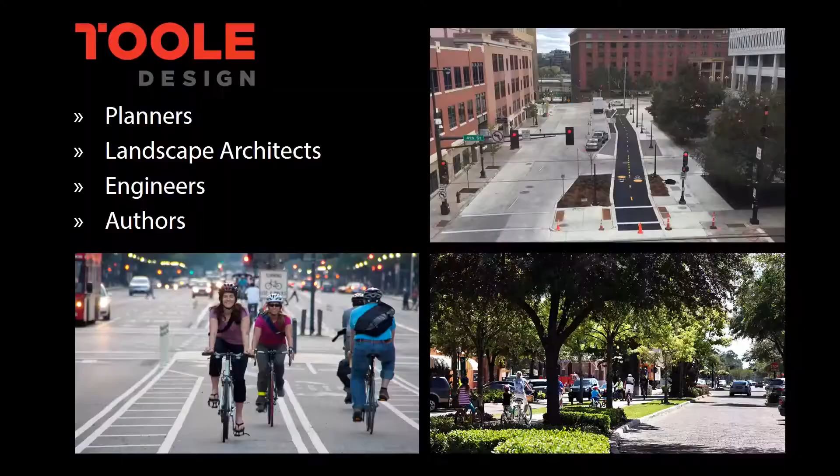We write a lot of these guides, and we share them with provinces, states, cities, and our competitors actually, to help them design really cool streets.

So this is what we did this week. We have four opportunities for public participation. We had two open studios where people came down, looked at plans, gave suggestions, looked over our shoulders, asked all sorts of things, had suggestions. And we had a public meeting on Tuesday evening, and then we have this public meeting.

So what we'll do tonight is go through more or less what we've heard and what we did, and then we'll ask you for your input, since you haven't had a chance yet, so you can share with us.

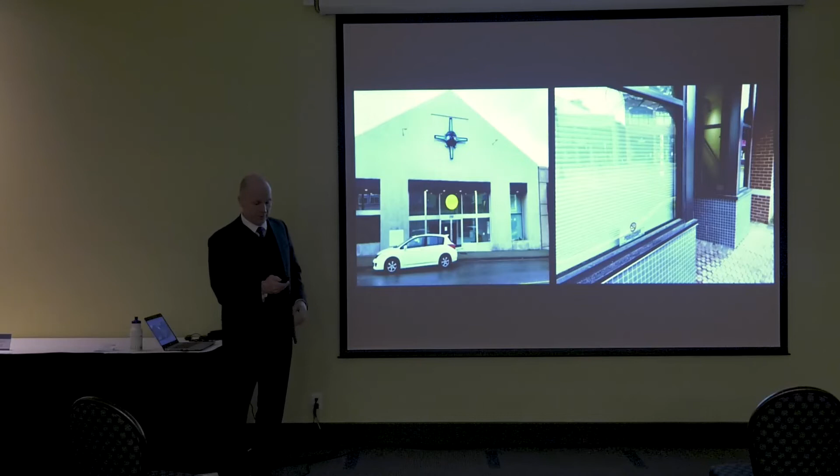And then from an access perspective, we want it to be friendlier for people with disabilities. We want the sidewalks wide enough so that maybe two couples could pass, that kind of thing, that you can have your displays so you can get your loading done. Parking is important to a lot of people to access the downtown, parking for cars and for bicycles. Keeping the street network intact so you can access the neighborhood from various locations.

And then removing obstacles. There's some trees that are in the path. There's sandwich boards that take up a lot of the sidewalk width. There's a bunch of obstacles, and if we could get the sidewalk widths wider, we can have room for those things and people to walk more comfortably.

Legibility is really important. So when you're on the waterfront, do you know that there's a downtown up there that you could go to? You've got some really great landmarks like the Bastion, and when you look the other way up Bastion Street, as you kind of go up the hill a little bit, there's a great view of the church. And so these are landmarks, and they can help people navigate.

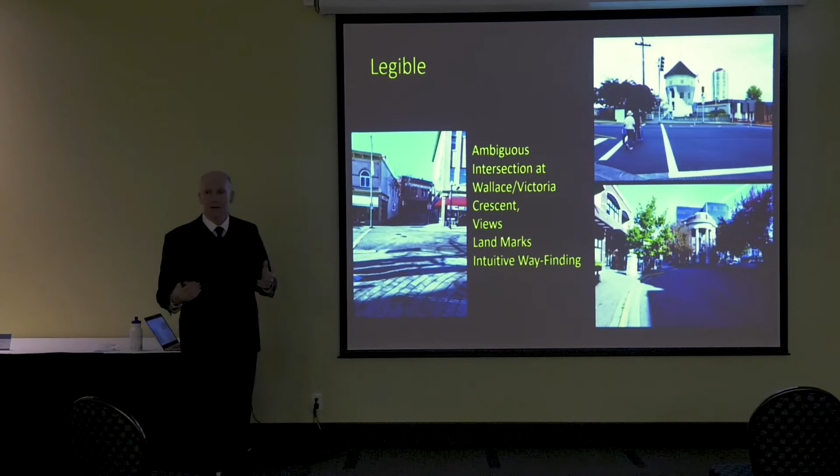There's some places that aren't legible, like that intersection we were talking about earlier. So we'd like to correct that, just so that everybody can intuitively find their way around the downtown, whether you're on foot, bike, car, what have you.

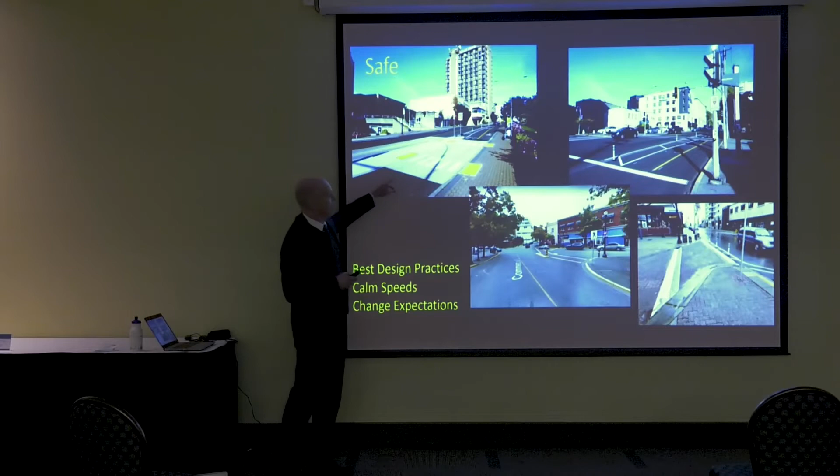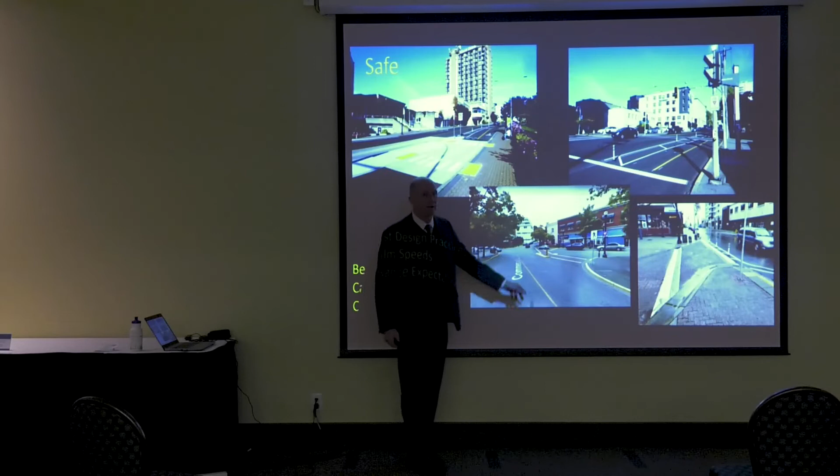We also want to make things safe, and there's already been a lot of work done on Front Street to try and make the street safer and more comfortable for cyclists and easier to cross through that project. But in towards Commercial, there are places that we would like to use best practices to reduce the probability of any collisions, injuries, or that kind of thing. Like when we were at this intersection, there was plenty of honking and discomfort up there.

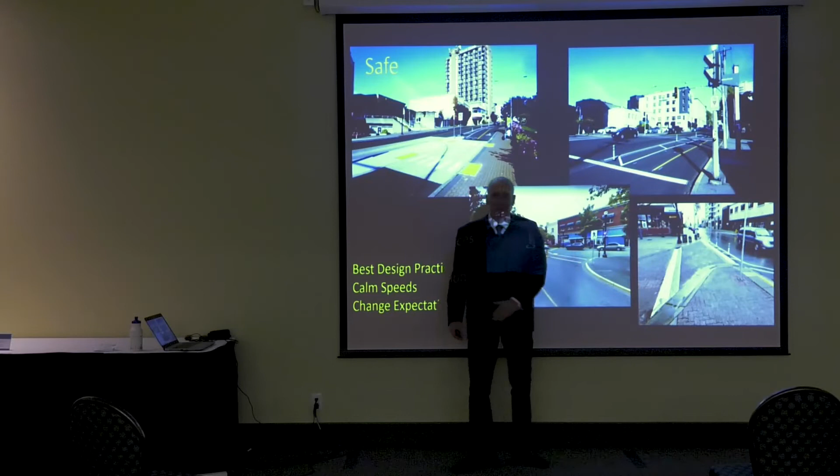This is the high-speed turn channel at the end of Church, which the city has rightly blocked off because folks would come off too quickly up into the downtown.

And then equitable. We really want the downtown environment to be accessible for everyone who lives in Nanaimo or visits Nanaimo, whether you're using a wheelchair, if you have a visual impairment, or if you're elderly or young—to make it accessible for everybody.

My parents retired to Nanaimo, and my father used a wheelchair, so when I came here to visit him, he didn't have the best time getting around because a lot of the areas weren't really designed to accommodate him adequately. So I'd like to accommodate people with physical disabilities more so than it is today.

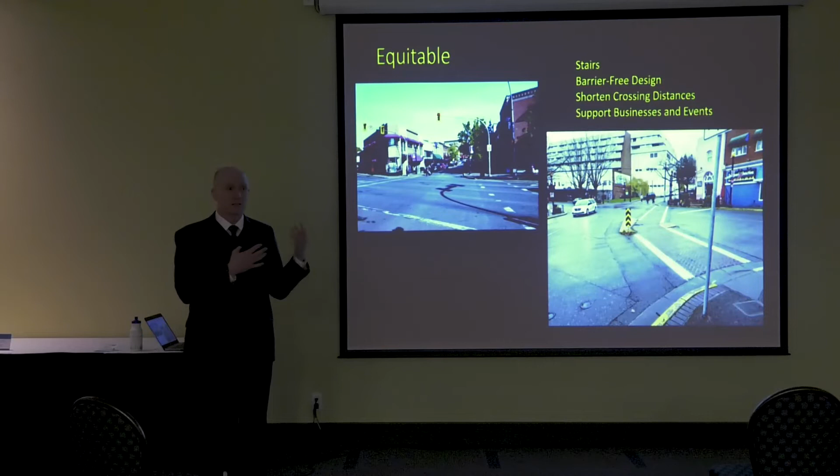We also want to support the businesses and the events. We really need to maximize the social and economic exchange. We need to design the street to help support the businesses. We want this street to attract more businesses to the downtown and more people downtown.

And we also want to integrate the public spaces with the street. You've got a couple of public spaces with tremendous potential: Diana Krall Plaza, the Dallas Plaza down at the end of Church Street with the cenotaph in it, and little public spaces like the Cole Monument just down by Church Street as well. But they're kind of alone—you have the street and then you have these spaces.

What would help you when you're doing your events is to better integrate the designs of the street and your public spaces, so that when you close your street you have a nicer venue for your events. So we'll be looking at that when we come back during our design week. Some of the students that visited us this week actually came up with some starter ideas, which will be shown in a few minutes.

A lot of cities develop what they call a vision, and a vision is a consensus of what the place ought to be like—not necessarily what it is, but what it ought to be like. So that's what we were talking about this week: what are our values, what should Commercial Street be like in the future?

There is no vision statement for it at the moment, but there's been a lot of work done through this Reimagine Nanaimo initiative, and there are all these goals that have been created. If you apply those goals to Commercial Street, a vision would be something like this: a green, connected, and equitable place that reflects the history of Nanaimo while attracting people, investment, and vitality. So that kind of reflects the goals.

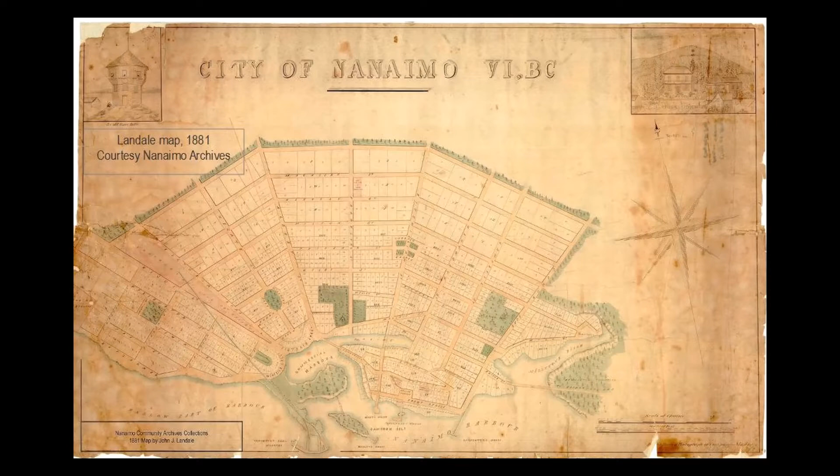The water came deep into the downtown. This is Commercial Street right here, and it goes into Church. So that's been there since the beginning, and that's why it has such a great history.

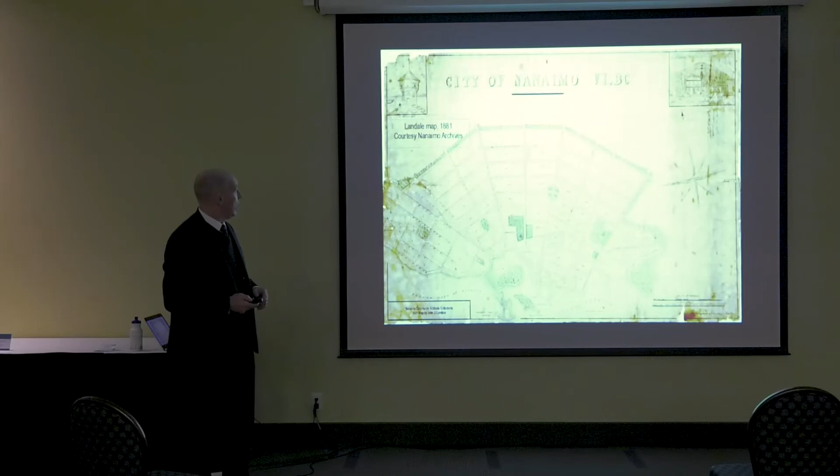And then over time, these areas were filled in, and the downtown expanded. These are some of the key routes through the downtown: Wallace, Terminal, and Front. And these created barriers, and there's some geographical barriers as well to access the downtown.

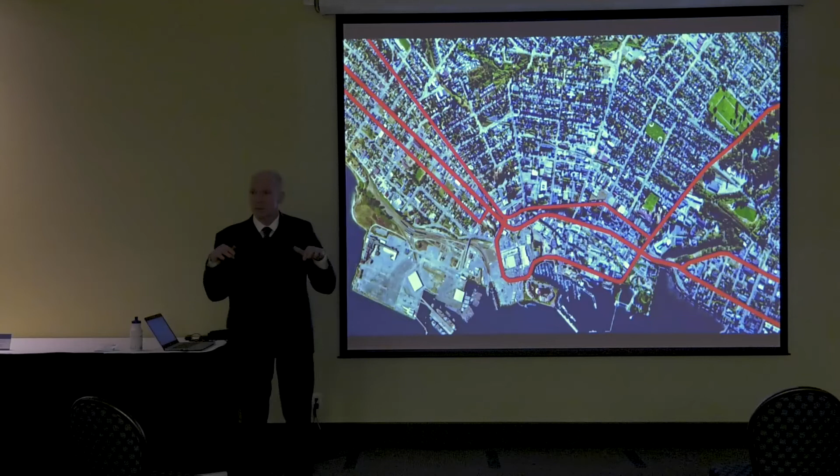So what we'd like to do is ameliorate some of those barriers to allow more exchange, more value coming to the downtown from the community, and make it easier to access the downtown.

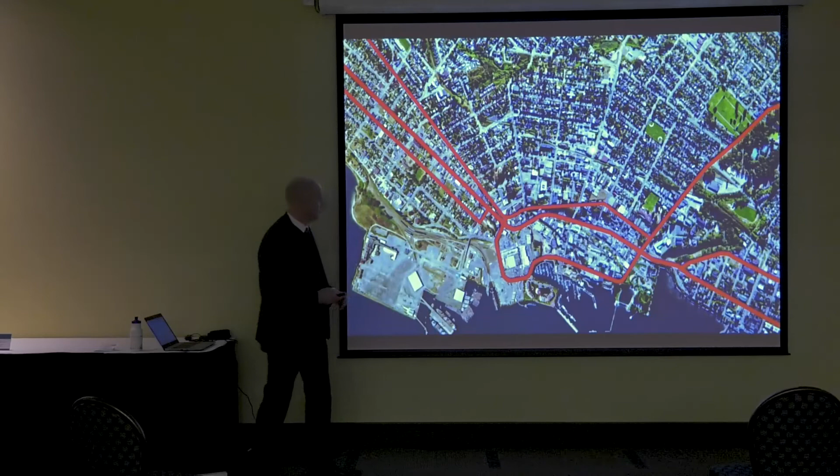And so that's what it looks like over the old historic map. You can see where there was water now—there's Terminal, there's Front Street where there used to be water, but good old Commercial Street still right there.

But the interesting thing, when you look back at the history of Nanaimo, for most of the history, there were no crosswalks, there were no traffic signals. These were all shared spaces where you could walk, travel, shop. They were truly public spaces.

And that's kind of the sentiment we'd like to bring back, is to make it a really public space. You can still drive on it, you can still walk on it, ride your bike, shop, socialize, but get back to the original historic intent, instead of some of the streets which are much more car-oriented for throughput.

I just want to go over the West Palm story. We've heard a lot about people experiencing homelessness, people with addiction issues and other social issues going on. A lot of places have challenges like that. And I'd like to share the West Palm story with you, because that place had pretty serious issues like that as well.

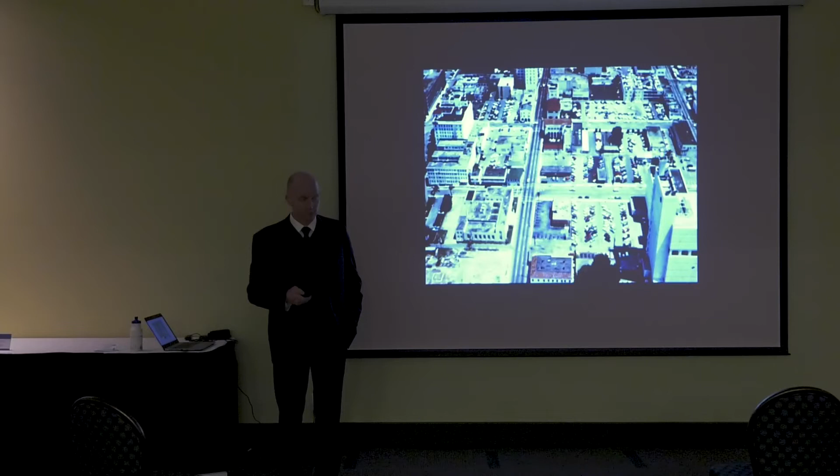When HBO needed a location to film a documentary about drug abuse in the United States, they came to West Palm Beach, and they found everything they needed in our downtown. It was nominated for an Academy Award in 1989, and that's how everybody knew about our city.

And so we had really serious problems. Half our buildings had been torn down for code violations, or they fell down, and they became surface parking lots where people drove back in for jobs. And so this is what we were left with, this sort of vacant city that was boarded up.

Derelict and quite unattractive. This place used to have houses on it. They were all torn down.

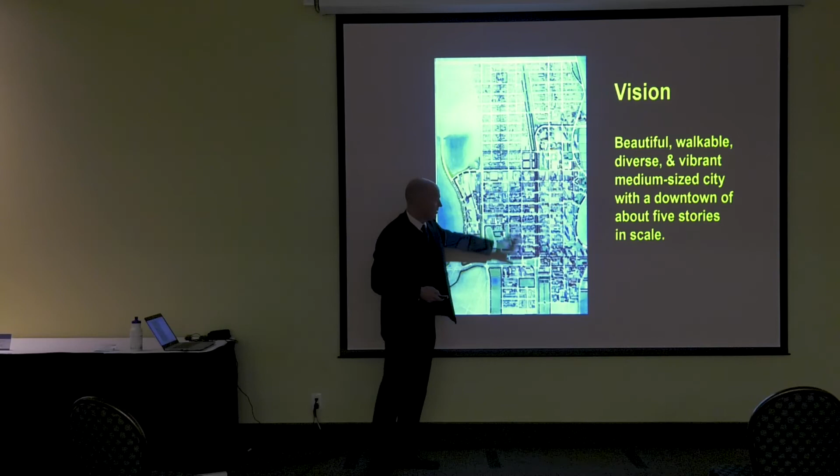And the mayor, Nancy Graham, decided to do something about it. She was newly elected, and she had a charrette, something like this, but involving a lot of people across the whole city. They came up with a vision, and they actually drew it. They drew this fantastic land use vision of this mixed-use development with housing and shops and grocery stores and all the sorts of things you'd want in your downtown.

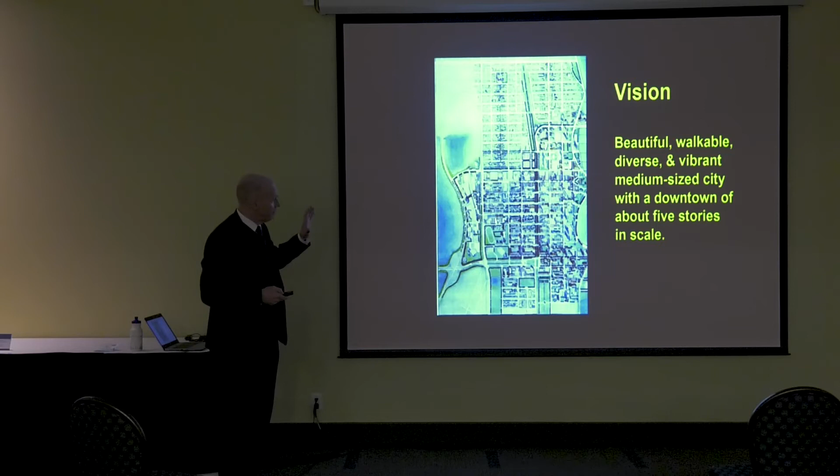But they didn't draw the streets. And so that was my job. I was to make the streets support that wonderful vision that they had for the downtown.

So I had to go to the state, which is like going to the ministry here at the province, and say, look, I'd like to change something here. I think we've dedicated too much space to motorists, and I'd like to remove one of those lanes, widen the sidewalks, plant some trees, that kind of thing, to make it a place that people would want to come to.

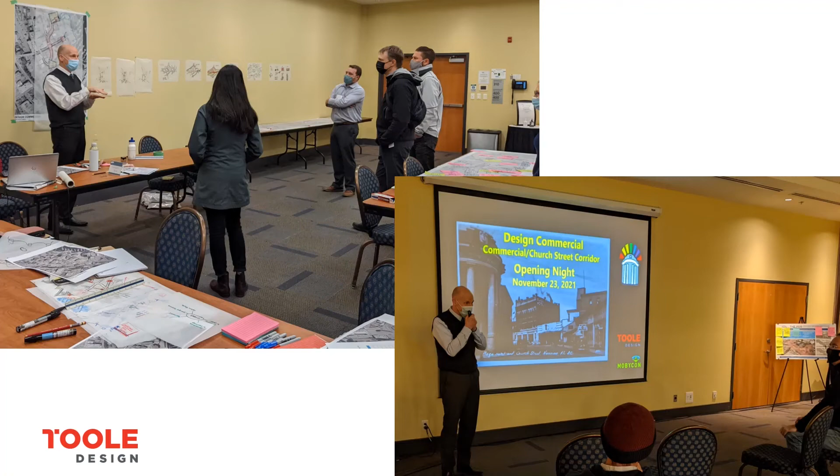And we went on walks and saw the area, learned about the physical layout of the place. People came in, and we had pinups. We had a little public meeting. Got input then, and here's some folks talking about some ideas for the corridor.

These are the students drawing some ideas for a couple of the plazas. There's one of the groups. So this is what they came up with.

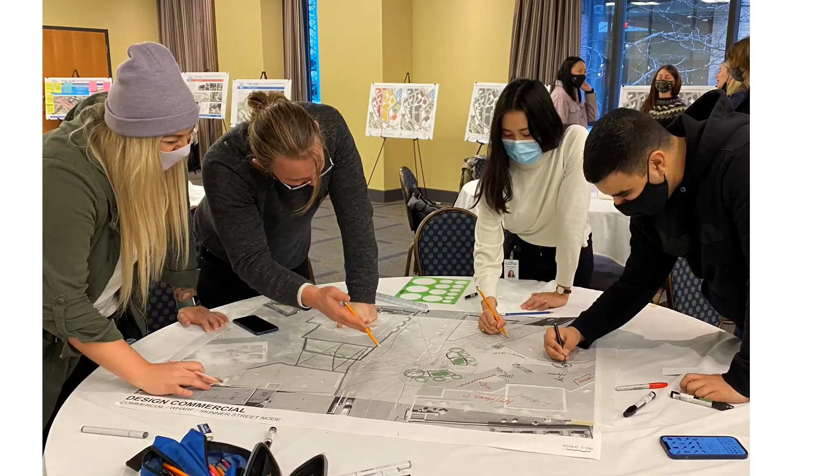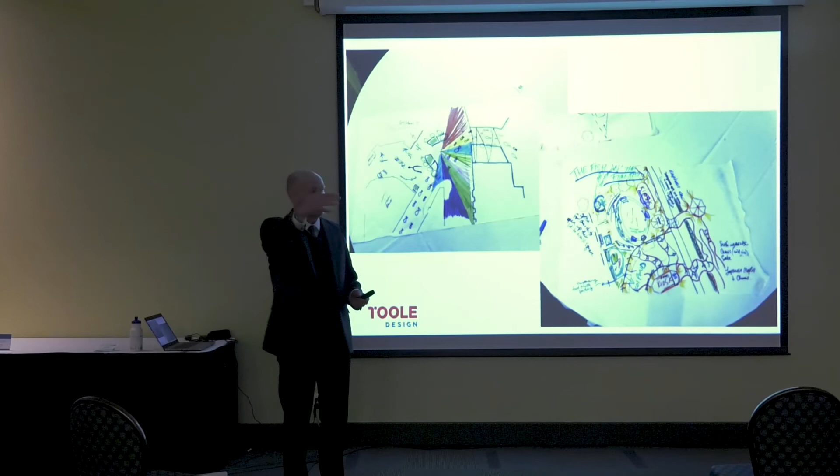Some really terrific ideas about how to expand Diana Krall Plaza and include the street, so it doesn't feel like such a separated place. Adding other musical elements into the music theme. Cool wayfinding idea of having salmons, artistic salmons starting down by the water, coming up the street and into Diana Krall Plaza, like a wayfinding thing. It would be really interesting.

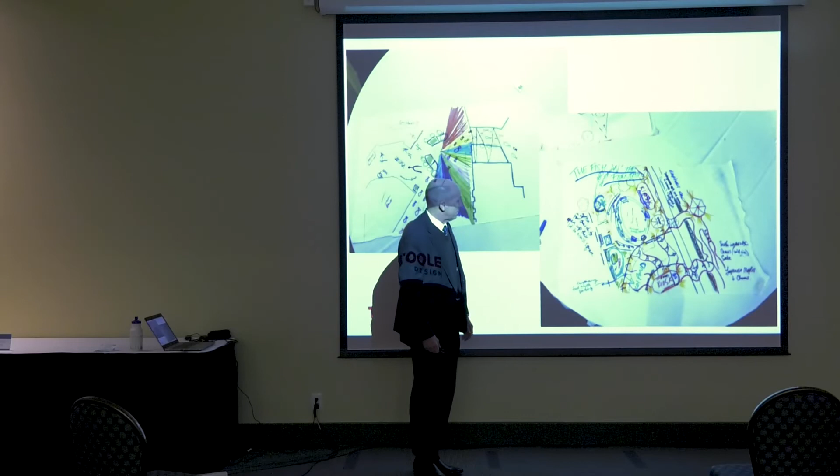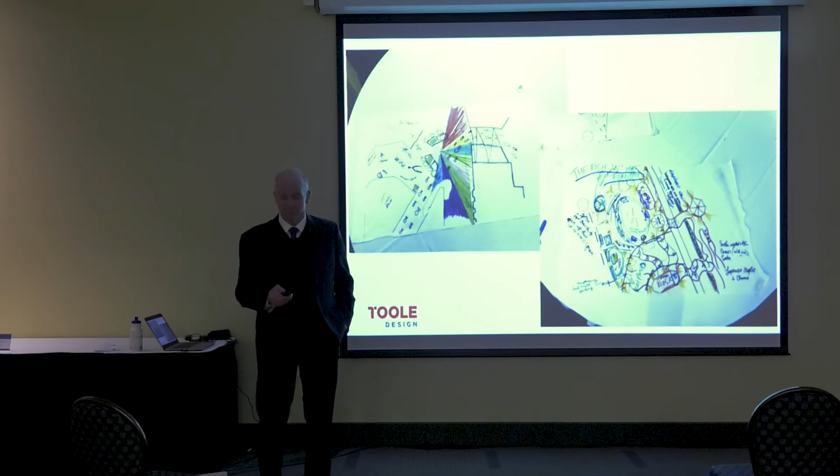And then we looked at the Dallas Plaza, where the cenotaph is, and found ways to make it more interesting and more active, so it can still do its ceremonial roles, but can have other uses for the rest of the year as well. So it's just not a November 11th thing.

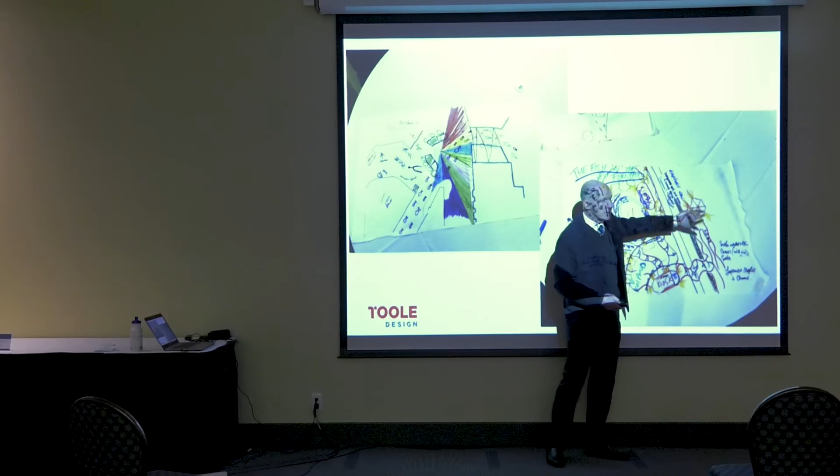One of the ideas, which is pretty neat, was to spread some of the plaza ideas across Front Street, so that when you're going through there, you know that this is an entryway up to some place that could be really interesting, to sort of advertise the fact that you've got this really cool street up there. And then we had our intern put it all together for us right at that table right there.

In terms of accessible, there's a lot of interest in making it more pedestrian friendly, making spaces more flexible, especially for events. Ensure loading zones. Not everybody has an alley where they could load, some people have to load off of the street. Accessible parking. The sidewalks was important for a lot of people to make them wider. Uneven surfaces - these are the sorts of things that people were interested in.

Folks wanted some wayfinding, get rid of the confusion at some of the intersections, safer crossings, reduce the high speeds. Somebody suggested a roundabout up at that strange intersection.

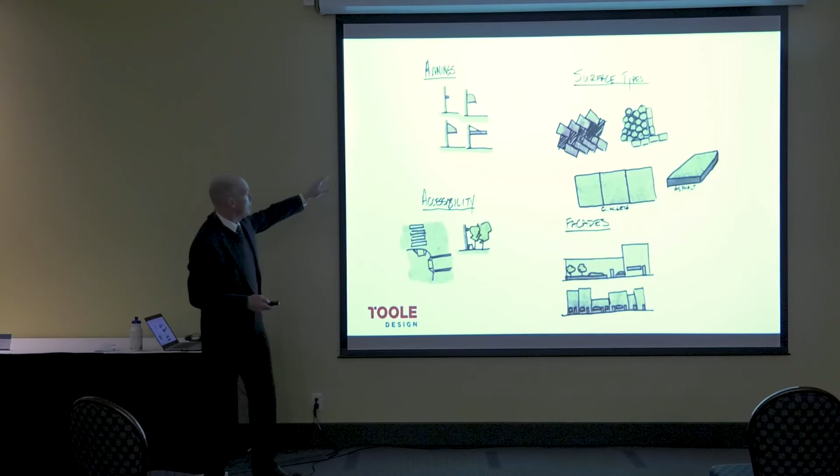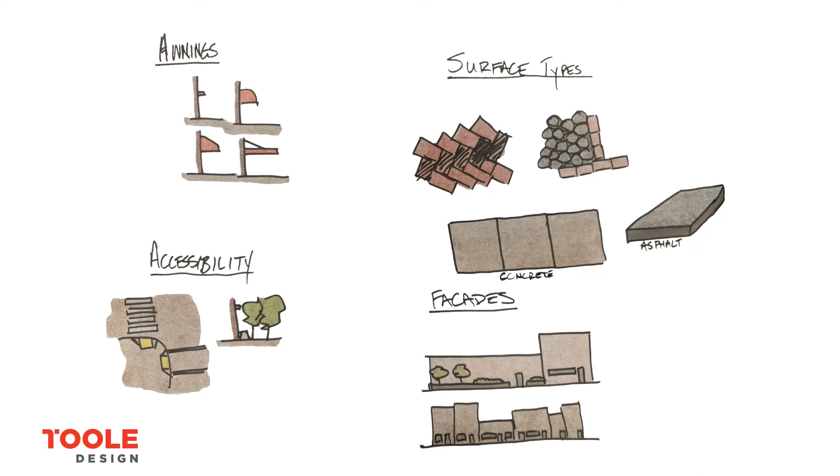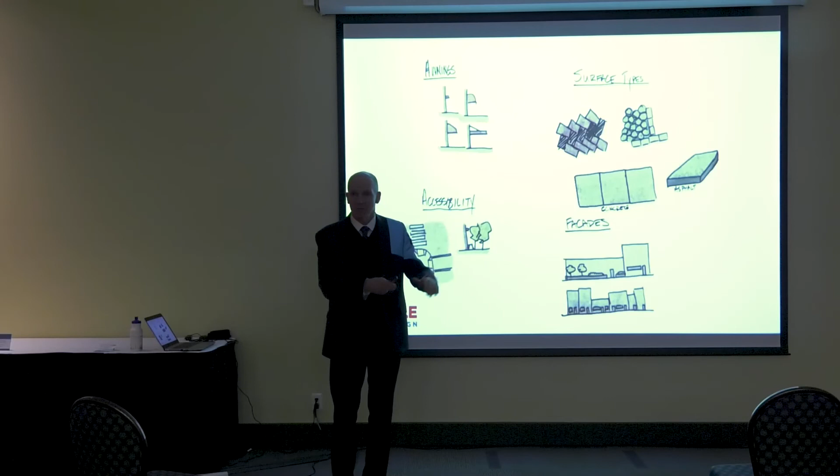There's a lot of ideas we heard about the awnings, the accessibility, the trees that are in the way and some of the sidewalks, the different facades, what people didn't like and what they did like, all the different paving materials and the benefits and disbenefits of those. Some people said that the pavers in the sidewalk caused them issues when they walked, tripping. There's some elderly people who had tripped on those, and they would probably prefer a brushed concrete sidewalk. We kind of like the texture in the street because it calms the traffic. So we heard a lot of things about those sorts of design things.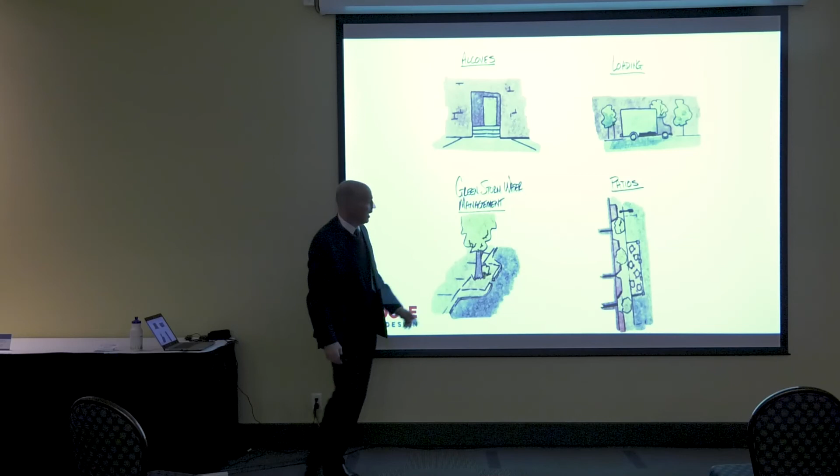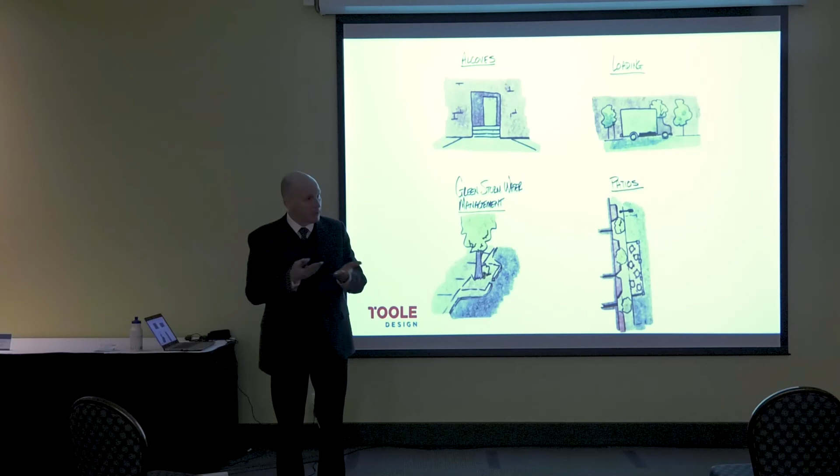From a comfort perspective, the alcoves - some people felt they were kind of creepy and didn't know if there was somebody in there. Loading came up a number of times, that we need to really manage the curb well so that it can serve all the different needs of the street. The whole idea of greening the street and making it softer with trees came up a number of times. Maybe do something to help reduce the stormwater runoff. People really like the patios idea because they can have outdoor experience in good weather. And today, because of the curbs and so forth, you have to build those platforms. So that curbless street would provide a lot more flexibility, so during the right times of the year, you can have far more seating out in the street.

And then the connections.

The street doesn't exist in a vacuum. It's connected to places, and some of the connections are stronger than others. So where there's a solid line... so I guess which way's north? That way's north?

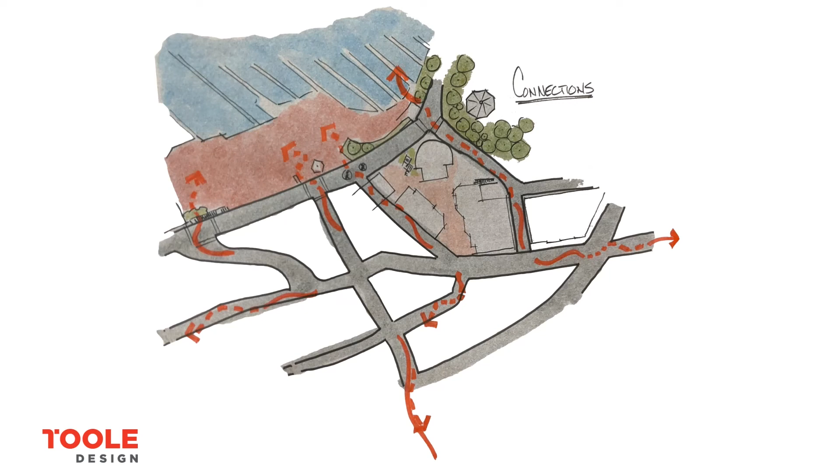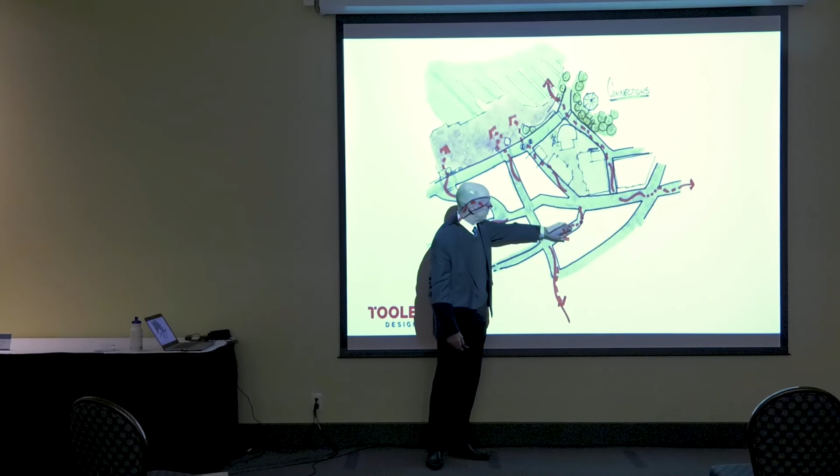So here at Diana Krall Plaza, when you look across the street, there's that little one-way street, and when you look up, there's a really handsome building. I can't remember what it's called. Something station? Plaza Hotel. Beautiful building. But then when you go around the corner, it kind of is not so great anymore.

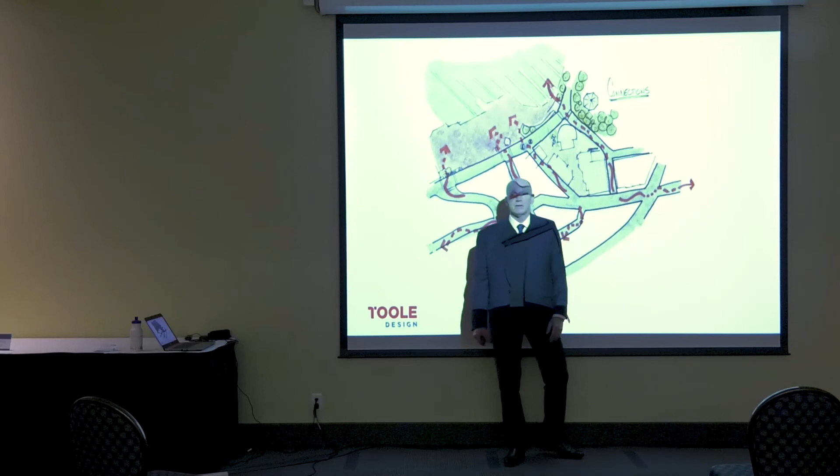When you're crossing Terminal, it's fine as you get near it, but then crossing is difficult, and then it kind of falls apart at that intersection. When you're coming down Church Street to cross the street, that's fine, but then it gets pretty ambiguous when you cross the street. It's not intuitive how to get down to the water.

So what we'd like to do is identify the key routes that can help people get from the water to the downtown and improve the legibility and the accessibility of those routes so more people will find the downtown and come to the downtown.

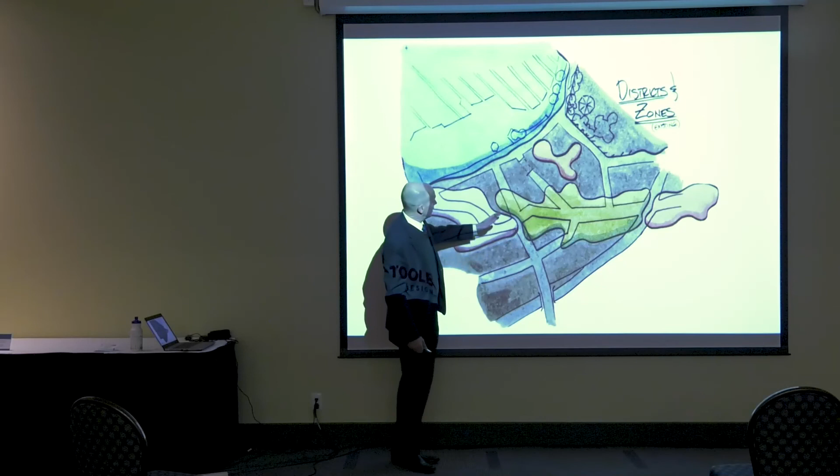So this is kind of a cartoon of what we felt were the zones. And Bastion Street was kind of a boundary. So this zone to the north is one zone, then there's the main part of Commercial Street, and then Terminal cuts off the Victoria Crescent area, and then there's this interior space in Diana Krall Plaza, which is kind of a dead space at the moment. So you've got all these sort of disconnected parts.

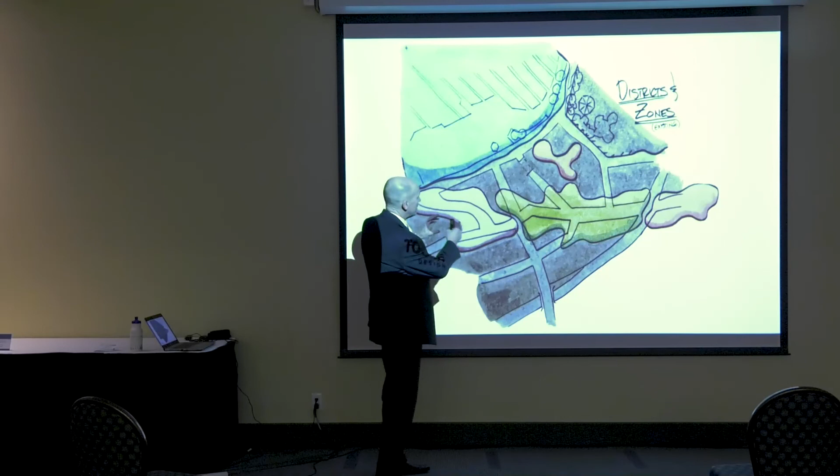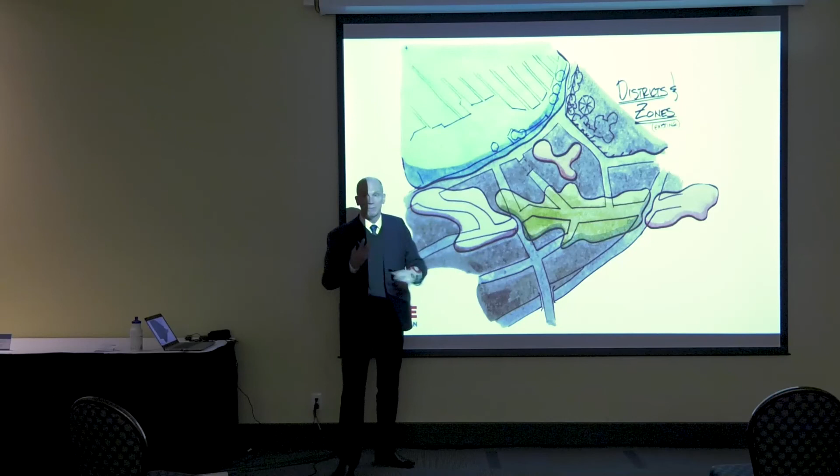Front Street, though a lot better today since what the city's done with the road diet and the bike lanes and stuff, still is a separator from the waterfront to the balance of the downtown. And it would be great if we could better connect across it and advertise through the design that there's something inland.

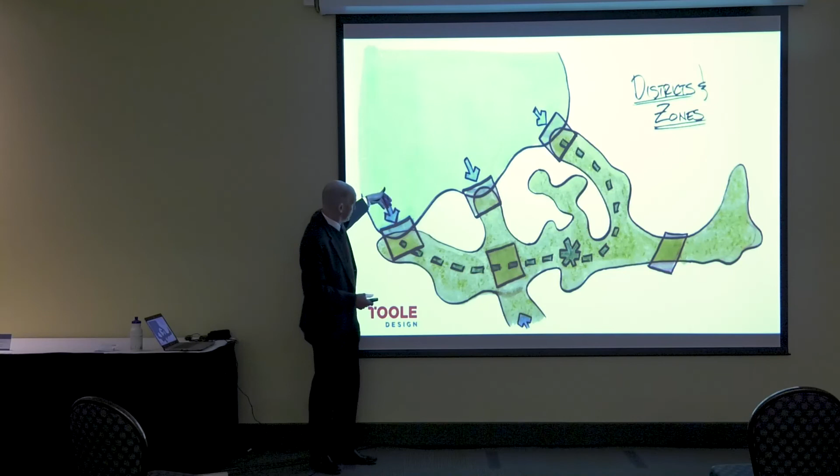So something like this, so that when you're at the end of Church Street, there's a clear route up to Diana Krall Plaza. When you're at Bastion Street, there's a way in, that the intersection at Bastion is more pedestrian friendly. When you're at Museum Way, you've already done some really cool stuff here. You've got a new hotel coming in, and make that a really nice connection.

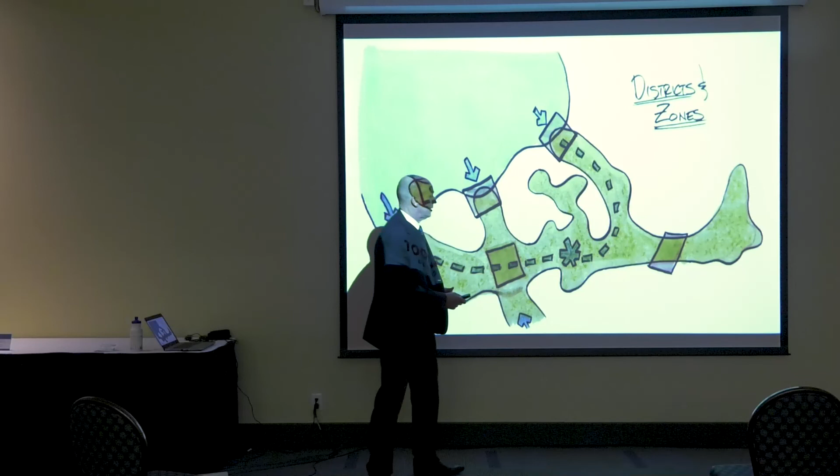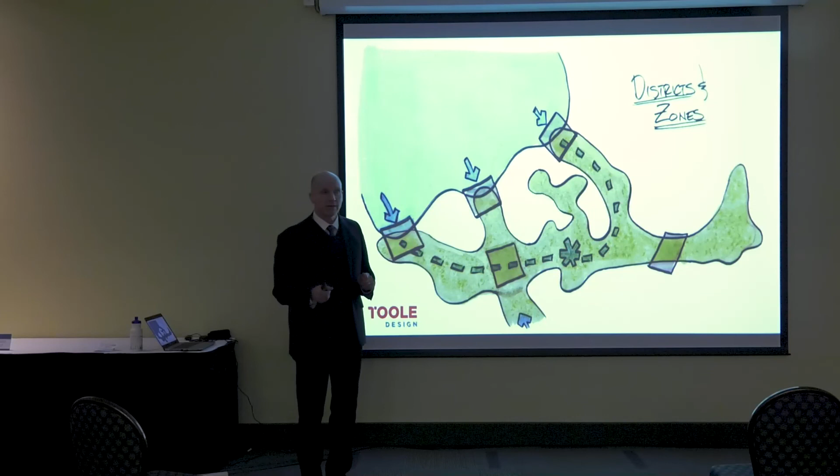Then, of course, do something to reduce the barrier effect of Terminal to integrate the Wallace Victoria area into the downtown. So these are the sorts of initiatives that we'll be looking at when we come back during the design week to tie the whole place together and make it more legible and accessible.

So this is about the same sort of idea, to reduce the ambiguity of some of the connections and make these strong connections that are legible. And people will just come naturally. They'll get curious. They'll see, hey, there's something cool there. I think I'll go take a walk.

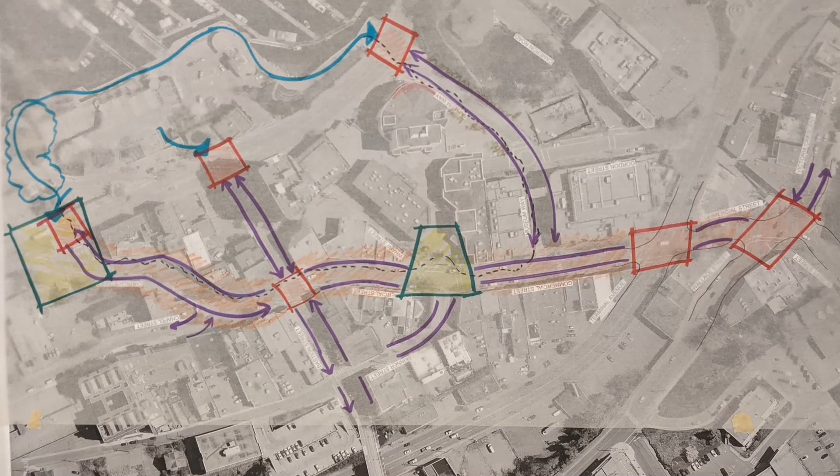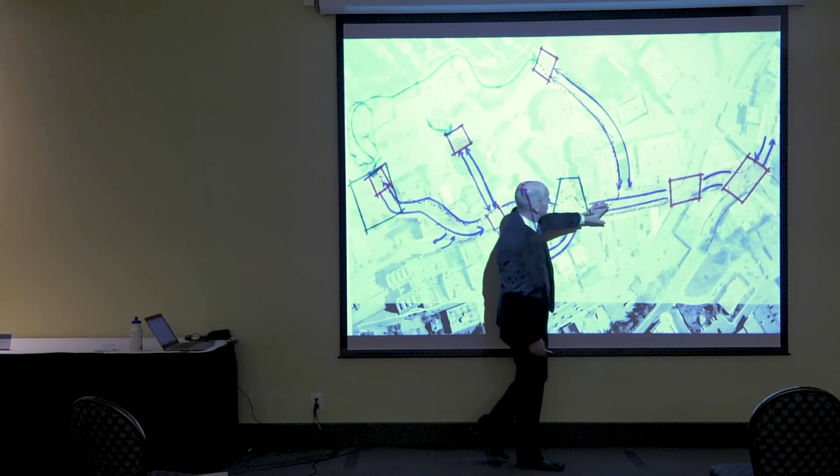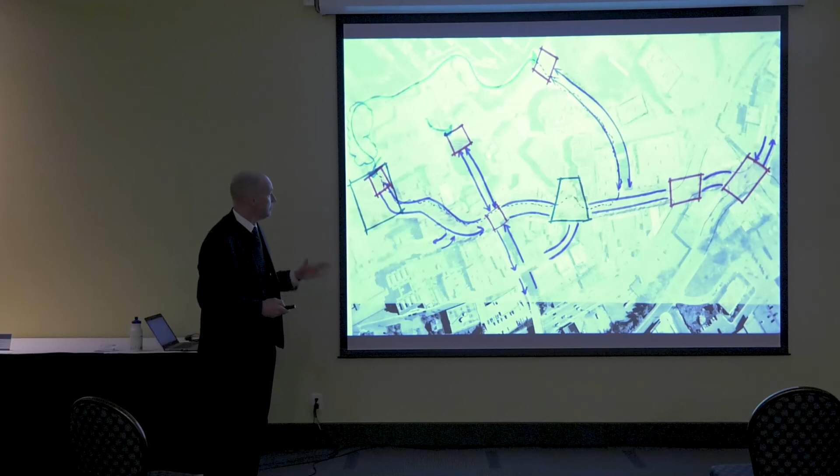And we're really looking at things like loops. People love loops. So they could come in on Church, walk down the street, past Diana Krall Plaza, and maybe go back on Museum Way, past the new hotel, and down to the waterfront. So there's multiple routes, and keep it interesting. That's the kind of thing that we're leaning towards at the moment.

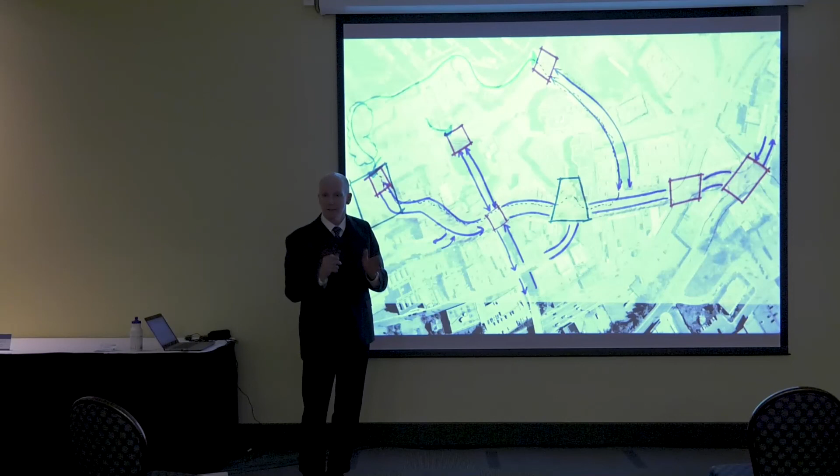And when we come back in February, we'll draw that up with the community and hopefully get a consensus on that's the direction for the area.

So this is what we did this week. We'll have three more opportunities. Next time we come back for collaboration, we'll have a couple of open studios on February 1 and 2, at different times, because some people are available later in the afternoon, some at lunch. This gives people opportunities to come in and see what's going on, and then there's a public meeting at the end. Hopefully then we'll have a pretty good direction of where the downtown wants to go.

But that's still not the end of it, but it's the end of the charrette part, and then there'll be subsequent steps after that. But we hope we get a really good consensus on the main ideas. So that's where we got to with what we call Discovery Week, where we learned what was going on.

And we shared some ideas with everyone who came about how to make cool downtowns and how to make great main streets.